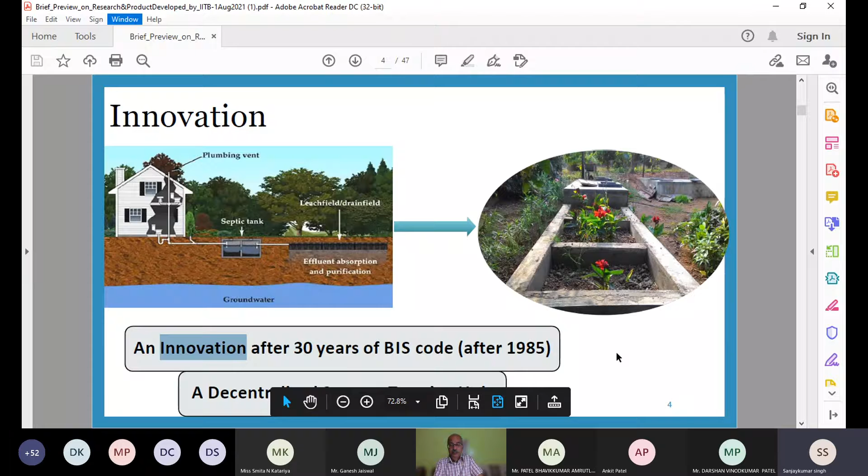Now, if we talk about the conventional septic tank versus our innovation SafeSan: the cost of both systems is low, but the energy required for sludge removal is very high in the septic tank system, whereas we don't have much sludge to remove, so we don't incur a huge cost. Disinfection facility is not part of the conventional septic tank, whereas we can integrate it on request. The cleaning frequency is annual for the conventional septic tank, whereas in ours we can do it every second year.

The reuse potential is not there in the septic tank, whereas in our case we can have a perfect reuse system. The land requirement is very high, whereas here we require half the land of the conventional system. The removal efficiency of total suspended solids is a maximum of 60% in the conventional system, whereas we achieve up to 90%. The removal of BOD, COD and those things is also very high, more than 90%.

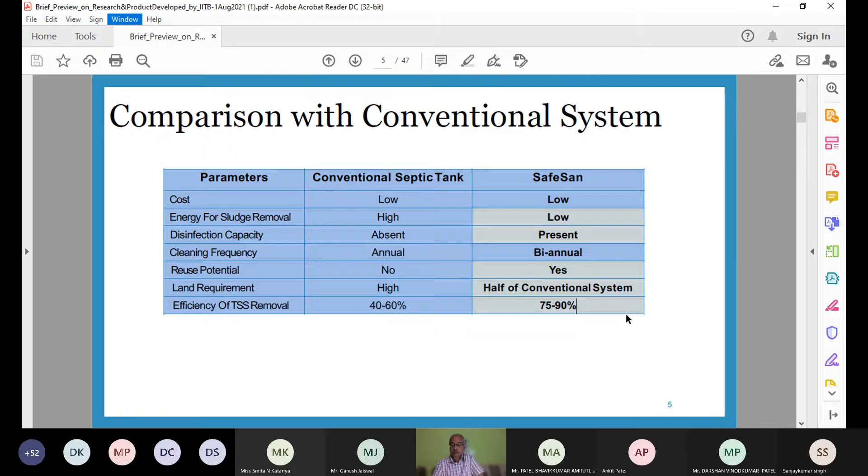So what is the design? This is the innovation: the sewage enters into the first chamber, and then there is a settling unit, which we call PSRT, primary solid retention unit. And then we have this chamber—

Can you please make everyone mute? Sanjay, please make everyone mute, otherwise somebody is sitting very near to his window. Yes, sir. I just ask everyone to— yeah, that's good.

So I hope you can hear me. Hello. Yes, sir, we can hear you.

Okay, then it goes to the digester unit. The digester unit consists of three parts: the first is the aerobic chamber, then there is a facultative chamber, and there is an anaerobic chamber. So three chambers are there. In the anaerobic chamber, I think you must know there should be no presence of external air. The way we have made it aerobic, whatever aerobic processes are there will happen in the first chamber.

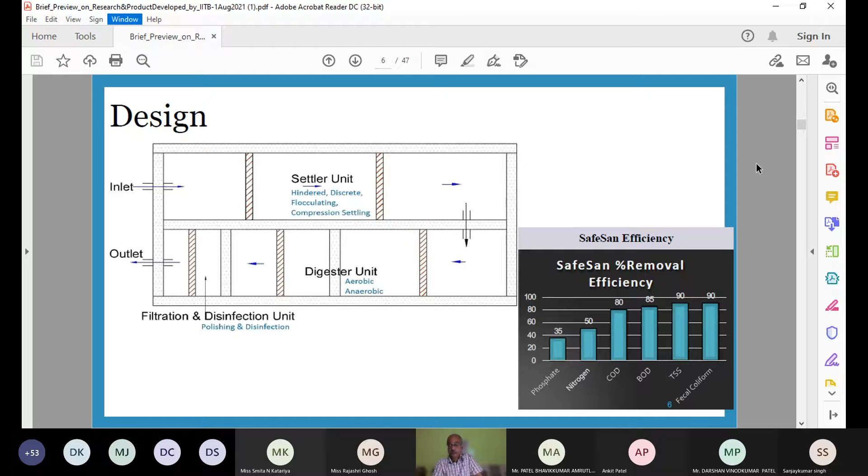I don't want to go into detail how it works, but we have two successful stories. The first one is that way back in 2015, we installed one such system in Alibaug near Mumbai, at a person's farmhouse. As you know, farmers don't want these units to be part of their home, and this guy was no different, so he wanted it kept outside. So this unit is outside.

So this is the toilet, and basically whatever comes out is fed to the plantation. He has these storage tanks for the purpose of flushing, etc. Now this is a very primitive type of design where we built the tank below, though the tank need not be below. Since he has a lot of space, we kept it here, somewhere outside, so whatever comes out stays there. But you can integrate it within your house also without any problem. Now this is called a mobile unit.

Now these 50 units which you see on the right of your screen are basically a standalone toilet. You can make it as a toilet block also. What you see in black is the tank where all the 4 or 5 chambers are included. We gifted, on behalf of IIT Bombay, 50 units for a tribal village called Kaulkhed Gomase, located about 5 kilometers from the Akola railway station. So a person can go inside, do the job, and the treatment will be done here.

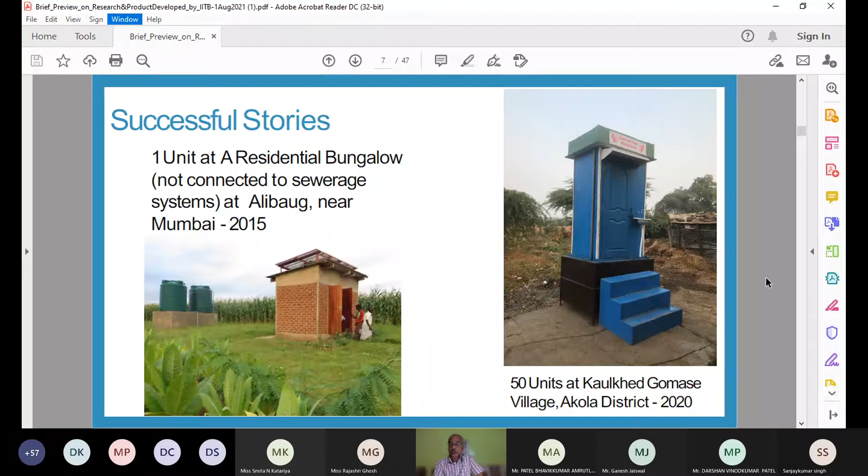So you can go on using it - you can reuse the same water. After a month it will become half, and at that time you can refill it, or use it for the plantation nearby. Now the second innovation which we have done, we have sought the replacement of the sewage treatment plant.

As you know, sewage treatment plants have many machines which consume huge amounts of electricity, and the construction and maintenance cost is very high. Seeing this problem in India, our research group has developed this particular technology which we call GSTP.

G stands for Green STP. Here we are making use of tertiary treatment and secondary treatment with the help of plants only. This technology is basically called integrated wetland technology. The product is called GSTP, and this is an IIT Bombay IP. Our tagline is: Green STP, treating the wastewater the nature way. Now I will show you what I mean by that.

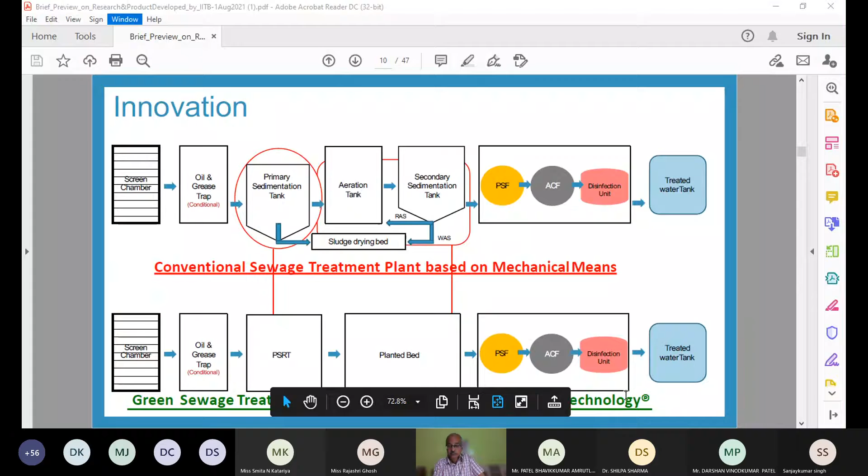Your voice is not audible. Hello, can you hear now? Yes, sir. Yes, now yes. Yes, yes. Okay, okay. Somehow it became, I think, off. So did they hear whatever I said, or do I have to repeat? Sir, for the last 1 minute.

Okay, so what I was telling is that at the top half we have the layout of conventional sewage treatment plant based on mechanical means. Here all machines are there. A screen chamber is there, oil and grease trap is there, primary sedimentation tank (PST) is there, aeration tank is there, followed by SST. Then we have pressure sand filter, activated carbon filter. Please remember these things are provided if required, and mostly in conventional treatment plants these type of things are to be provided. And of course, then it is discharged.

Nobody stores this treated water. Nobody. After disinfection, it will directly go into the drain or wherever they want to discharge it, to the sewer line or something like that.

Our innovation is that we have developed Green STP based on integrated wetland technology, where the primary sedimentation tank has been replaced with PSRT, primary solid retention tank, followed by the planted bed. The beauty of our PSRT is that it incorporates all four kinds of sedimentation in one tank itself by providing enough time for the purpose. The planted bed basically will replace the aeration tank, SST, and even the tertiary treatment. There is no need for RAS, wasting of sludge, or sludge drying bed. Nothing is required normally, and the remaining units can be there as required.

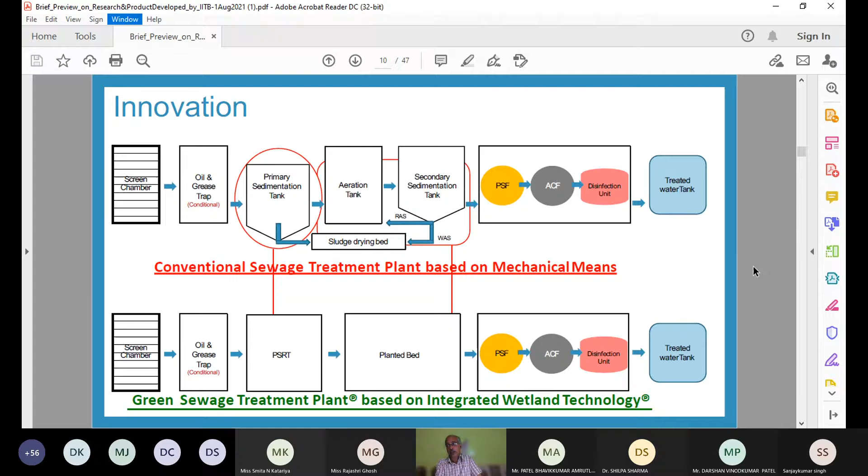Okay, now let's go to the pictorial way. You might have seen this screen chamber with lots of bars. Then you might have seen the oil and grease trap, a small chamber. Then we have the primary sedimentation tank with a raking system, a circular type of system. The aeration tank basically has an aerator which provides oxygen.

So it is costly because there are two types of systems: one based on the surface aerator, one based on bottom aerators where we have the compressor system. There's no motor or fan required there, so that is better in some sense. Then we have the secondary sedimentation tank, again a very big tank required, followed by the advanced system for pressure sand filter, activated carbon for final treatment, and ozonation system, etc. Now in our case, we don't have this type of system.

We provide the screen within your building itself, where 60 families or 300 people may be staying. PSRT is provided either on the roadway, just at the entrance, or near your garden, or below your parking - you can do parking there too. And then we have the planted bed. Planted bed means you can beautifully design it the way you want. I will show some designs.

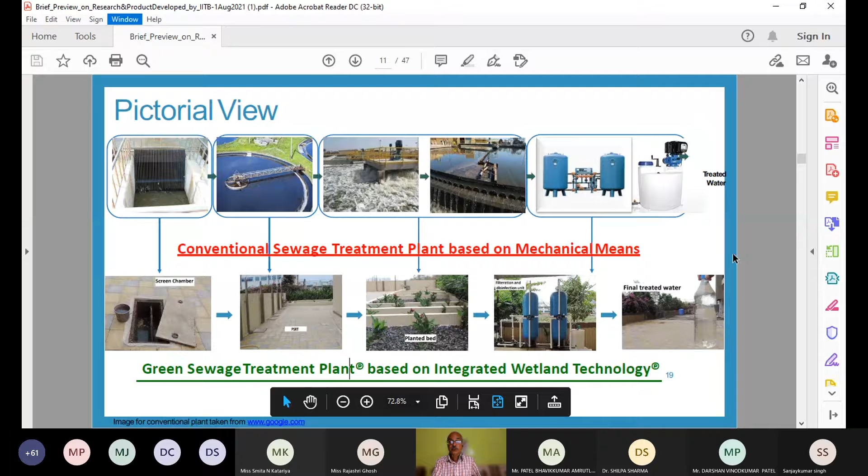So you will not be required to pay sewer tax, etc. You will save two ways: directly by not paying the sewer tax, and secondly your water bill will be reduced, because a huge amount of water is used for flushing toilets or for gardening. You can use the same water, which is very good quality, for your rose garden or whatever garden you have. So the saving is twofold. Now let's come to the design part.

Finally, whatever water is there will enter into the planted bed. What is the planted bed? It is basically the secondary and tertiary removal system. What it does is remove whatever suspended solids and BOD are remaining.

If you see the efficiency, the PSRT removes up to 70 to 80%. I told you there are 4 chances of solid removal, so up to 80% is removed. Very fine particles may still flow out, but they will be captured in this planted bed. BOD is also removed because a lot of organic matter will also settle here.

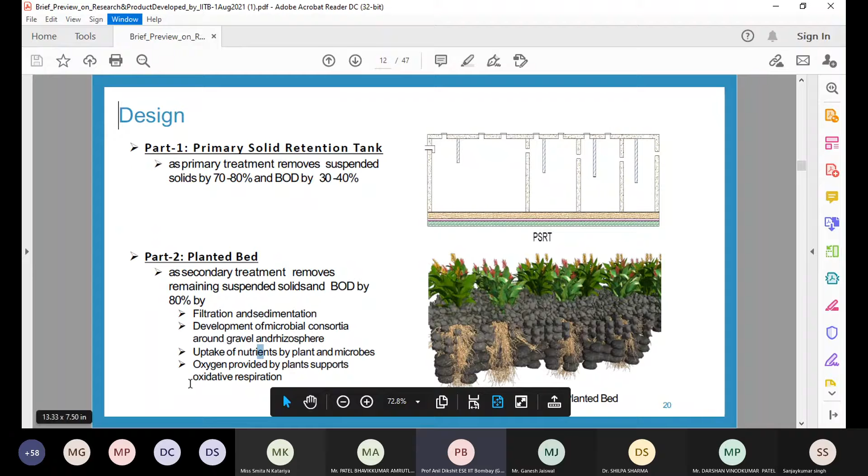As you know, nutrients, nitrogen and phosphorus, are used by the plants. So you don't have to do denitrification, etc. Also, no nitrogen and phosphorus will leave afterwards, which is good, because even if you discharge this water into a lake or river, it will not become eutrophic. In the design, oxygen is provided by the plant, so the BOD will become almost zero. So this is our innovation.

So the success story: we have completed a lot of projects. Sandip University phase 1 has been completed for 300 kiloliters. Rathe Builders in Karjat have small systems, standalone colony or building projects which they have developed. For the university, they have installed three phases for different places, and they have gone for decentralization as well.

So why carry the waste from one hostel to another unnecessarily? Wherever there is a huge amount of water, suppose 500-600 students are staying with a huge amount of waste, they have gone for three tanks or three green STPs there. So we have already installed these.

Now you should not think our system is meant only for 300 KLD. We have MLD plants also. For example, in Lonavala there is a very big hotel, Parias, which has gone for 6.2 million liters, or 6250 KLD. And then there's a society with lots of people and buildings that has gone for a 2 MLD plant.

Now let's talk about our third innovation, which is in-situ Nallah treatment, which we call NTreat. It is a sustainable approach for drain management, which we call Nala. Nala means drain, where wastewater goes and pollutes the whole river Ganges or any other river, etc. So what is the innovation from our side?

What we have done is make use of the Nala itself as a sewage treatment plant. Basically we treat it as sewage because BOD and COD are very high, because mostly industries and houses are illegally discharging wastewater there. What we do, you can see 4 or 5 stages have been shown.

We go for primary treatment and secondary treatment within the drain itself. If you see the picture below, there are some units I am going to talk about. The first unit is a screening unit, placed at an inclination. Then there are 3 depressions, which we call silt traps. Then we have the third section where a lot of baffles are placed.

So baffles will make the water not go straight, but take turns. We have basically created a free-flowing system of obstructions, and because of the obstruction the water will slow down, the velocity will become very minimum. We want to make it zero, but zero would mean flooding would take place, so a small flow is permitted.

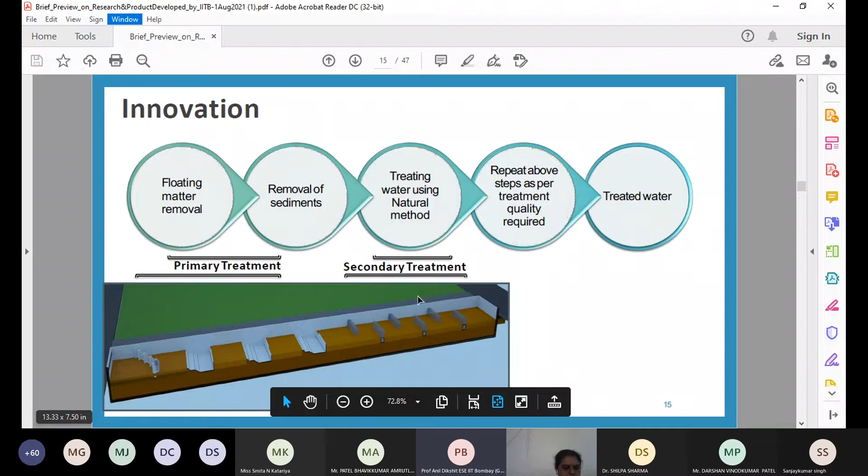This has to be made larger because here the natural biological treatment, NBT, takes place. The whole system is called NTreat, but this specific part is the NBT. These names are given by IIT Bombay. What we are doing is converting that direct 500-meter stretch into a 2-kilometer stretch.

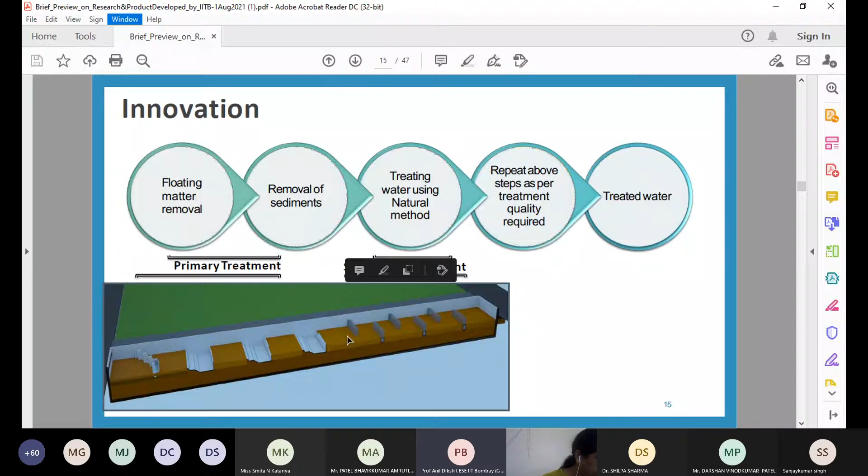As you know, if you make anybody calm, giving silence or solace, the person becomes like a yogi. Similarly, your mind is not moving, and the water is not moving either, it stays there. By staying there, it provides the opportunity for microbes to grow. In the first chamber, for example, the microbes that grow will depend on a lot of BOD. They want easy BOD, like glucose. They don't want fat or sucrose.

They want clear glucose. Now in the baffle, what we do is create not only obstruction, but we make them porous with a screen chamber, and we fill them with three kinds of stones: coarse, medium, and fine, then soil, and then we plant a lot of plants there.

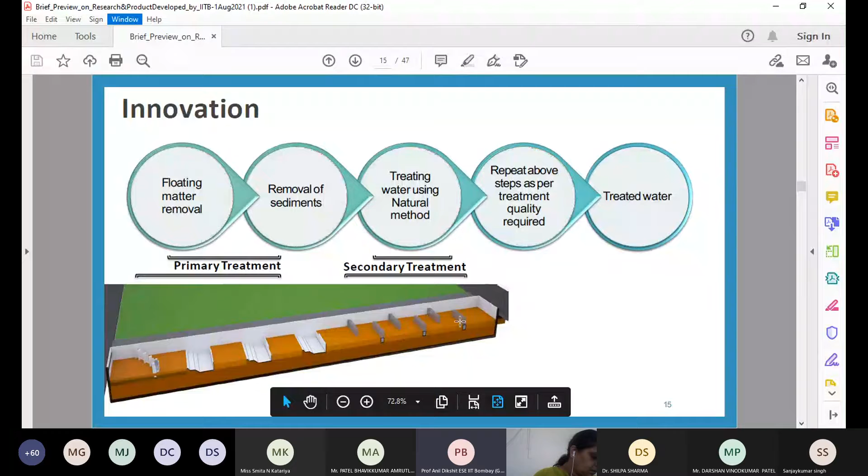Now in the second chamber, whatever BOD has been consumed will become less and undesirable. So initially enough glucose will be there, but afterwards glucose will not be there. Then protein and carbohydrate will be there, and they are used one after the other. So the type of microbes that grow will be totally different in different zones.

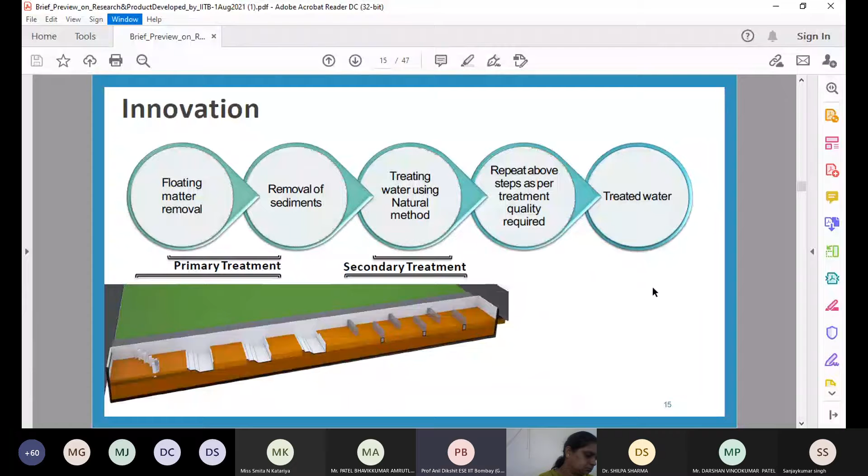How they grow, we are not controlling directly. They grow depending upon the flow characteristics and the loading characteristics. This is our innovation. We are mimicking nature's way.

This is how the first unit screen looks like. It is not provided across, but at an angle of about 45 degrees. Because the screen is at an angle, the floating matter will travel down and eventually reach the last section where it gets stored. So no manual cleaning is required, it is auto-cleaning.

The auto-cleaning system is built into our design itself, because that force component will bring everything to one point, where there is a bucket or automatic belt system that brings everything out. So you can design an automatic logic system. Every 2 hours, whatever has been floating gets brought out.

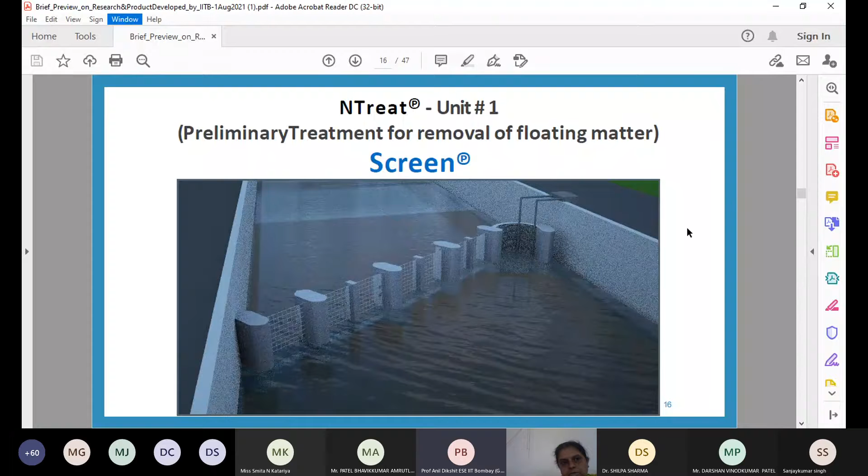So whatever wastewater or nala water passes beyond the screened portion will not have any floating matter.

This is unit 2, where silt traps are located. A silt trap is basically a depression with an obstruction. You can see at the end there is a wall, created as an obstruction, so the water has to flow above it. Since particles cannot climb the vertical wall, they get dropped here. All the coarse particles drop here because the velocity is quite low.

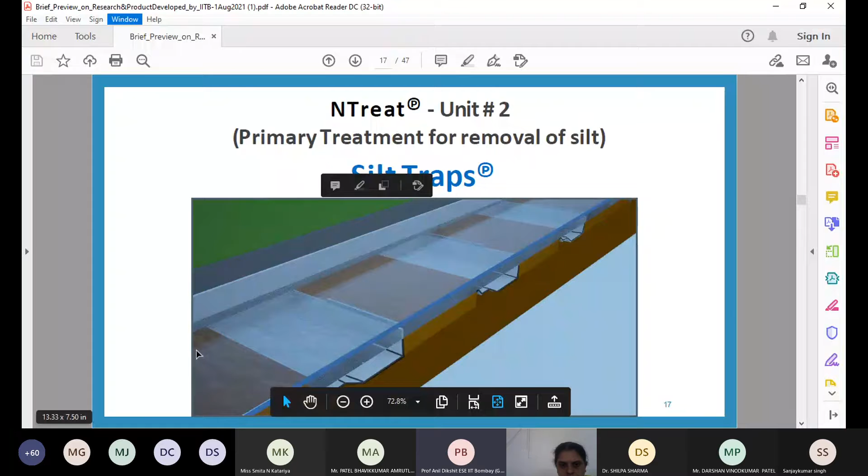Now because of the overflow, velocity, and obstruction, we have provided one screen. The medium particles will settle in the second silt trap, and then the water goes up again, with fine particles removed here.

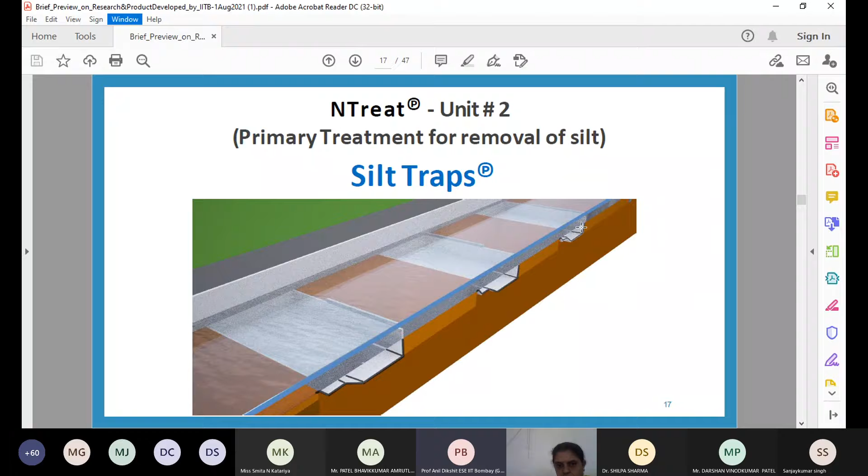Now, the natural biological treatment system. You can see the baffles are there, which are basically screen-based structures. Here the water has to flow in a circular motion, not longitudinal but lateral. It will hit the wall, take a turn, come back, hit again, and go in a circular or serpentine, snake-like motion. This gives microbes a chance to grow in the water itself.

Additionally we have provided filter media, where we use a gravel bed, and similar to the planted bed, we are providing that here as well.

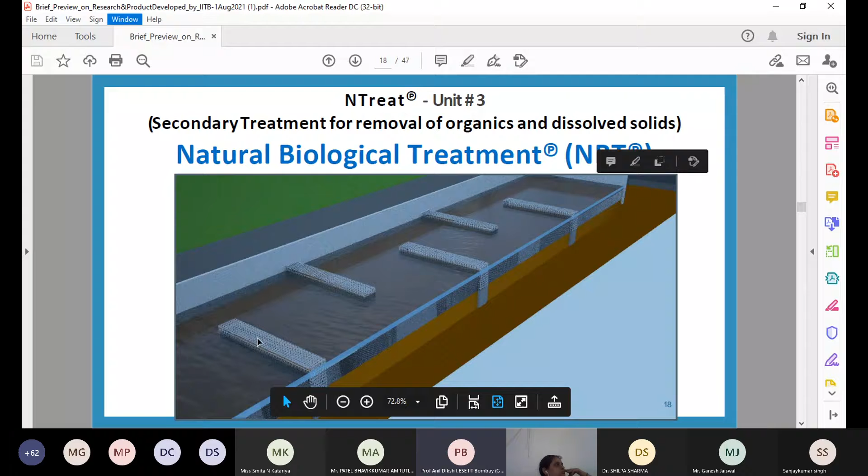Okay, because we have seen now, this is what, how beautiful you can make depends upon the design given by the landscape architect.

Here you can see people are playing. This used to be one of the dirtiest nalas. In order to beautify it, you can see this is the planted bed. Water is permitted through, and we have divided it into chambers. You can cross like a bridge, or if you are in playing mode, you can go up and down like this. So this beautification we have done.

What we have done, we have designed for what is one of the most stinking places in Mumbai at present. But because of the bureaucracy, there's a problem. Five years back we started this project, but it is not seeing any end, because MCGM has to do the job and money has to come from the MLA quota. Nothing is happening. Bureaucracy has taken over. We have provided them the design, but the money is not coming.

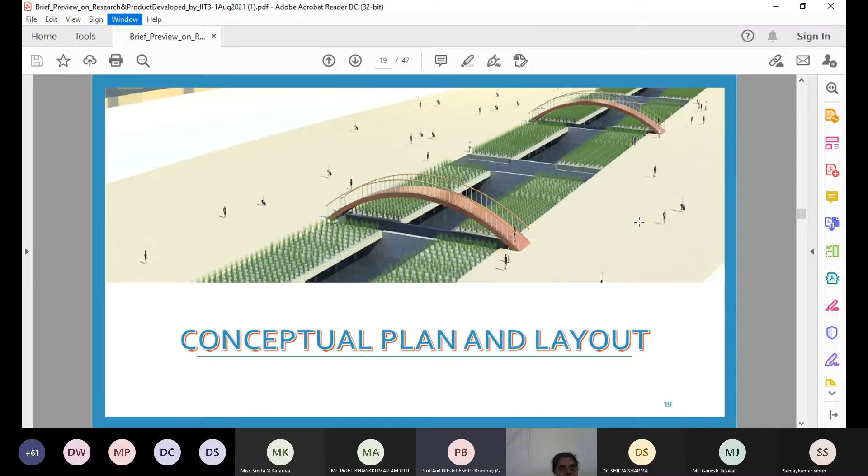Okay, so I don't know when this opportunity will come. I haven't seen it myself yet. Okay, so we have a lot of success stories. I'm going to talk about three success stories, and a fourth one also.

This is about Prayagraj. I think you must remember last year the Prayagraj Kumbh was held. So just before the Kumbh, we were asked by the UP government to install our system. We made a proposal that we could make the river Ganges clean by removing the load in the nala.

See, the river itself is not dirty. Dirtiness comes from the nalas, which carry waste from people who are either doing open defecation or throwing their connections into the nearby drain. So at three places we identified three drains. At Ulta Killa, you can see that the drain was not well defined, with different sections, and basically it meets into the river Ganges.

So we have constructed and given the drain a proper shape. Earlier there was no shape, now it has been given, and then we have constructed it.

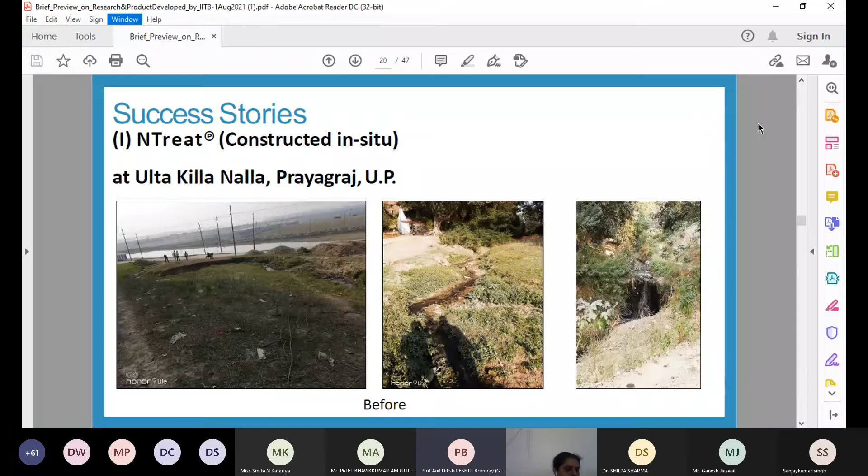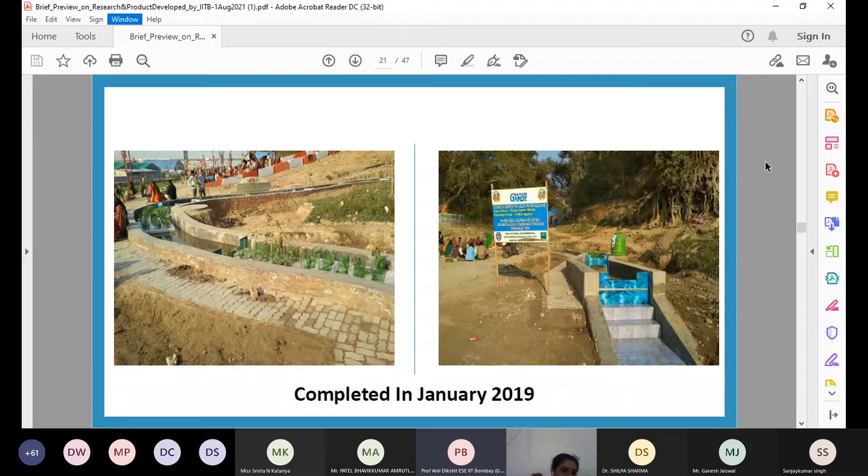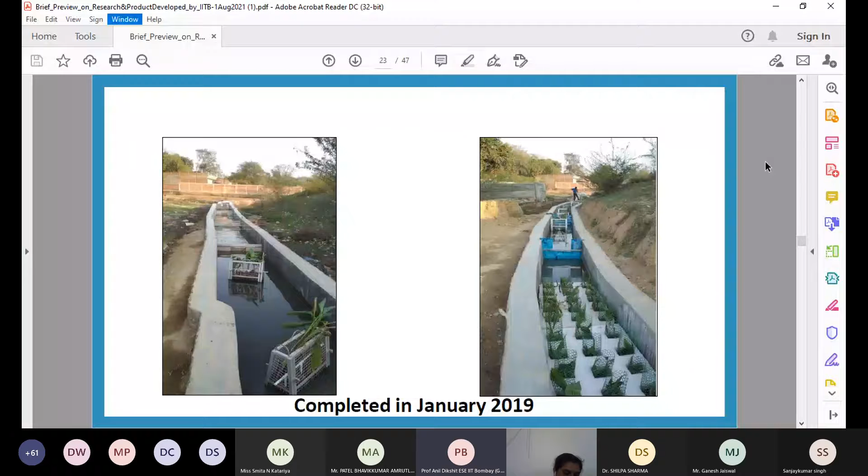So they carried on themselves, and have done a lot of things at the 11th hour as per their sweet wish, creating something that is not exactly the same version as my design. I didn't want to give my design to them, so let it be the NEERI design. The concept is the same, but the designs are different. But you can see this is the place before, and now it's much better. Then there's Savitri Nagar.

We have provided a lot of plants in this way. They have a system called floating system, something like that, which they are using. And this is the prefabricated one, there we have constructed in brick or RCC etc. We went for RCC because Government of India, everything is done at the last time.

So we got only 3 months to install, and Kumbh Mela was supposed to start. And the beautiful story is that on the other side of the river, where drains used to be, many sadhus chose to take bath there. Though it was sewer water, nala water, it was 1,000 times better, because government did not ask us to treat the whole system, and it was very difficult also because river Ganges cannot be treated so easily.

We have to treat all the drains only. If you want to treat all drains which are leading into the river Ganges, I think Government of India cannot afford that money. So Government of India only did the eye wash at that time, but the result was seen immediately.

We were very happy that many sadhus chose to bathe there because they liked that water as compared to the other, which was dirty. It was not turbid, it was not stinking, because we allowed the plants to suck all the BOD and everything, the nuisance. Even the odorous compounds were also absorbed by nature.

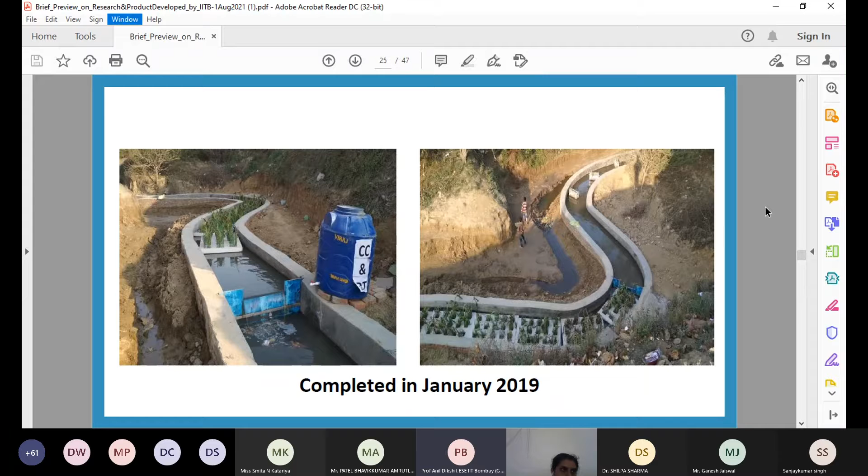This is the system which is prefabricated, and this is our system. We have installed this system as part of our obligation towards MMRDA. MMRDA has given us a very big project, I don't want to talk about that, otherwise it will take 15 minutes more, so let's not talk about that. But we have an obligation to show them that our system is working.

Since BMC doesn't allow us to construct within the drain because of a lot of bureaucracy, I have been struggling to get permission for the last 2 years. I became sick of it. So because of my own innovation, I constructed everything in prefabricated tanks.

Now, in order to simulate, we are pumping. There is a drain here behind this particular tree, which is very stinking. You cannot stand there for five minutes, such bad smell is coming because all Hiranandani sewage comes there only.

So what we are doing, we have installed a submersible pump. They are pumping the whole thing into the first chamber, and we have a stilling station, and then it is working. So we are going to generate the data for the next 3 months.

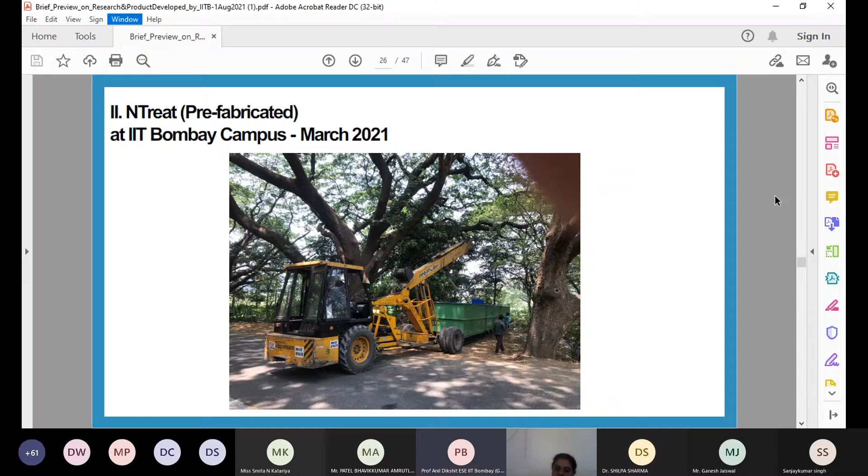Now this was about the three popular things in the area of wastewater. Wastewater is the biggest problem our country faces, because we have scarcity of good water also. We are converting good water into bad water, but we are not reclaiming the bad water. Because of that, many places have scarcity. Even Mumbai has scarcity, such that in May and June, during summer, water is only given 2 hours per day to most residents, except IIT Bombay and some campuses, because we can make our own water.

So we don't have that problem. We have 24 by 7 by 365 days running water all the time, but all other citizens are not that privileged. Now I'm going to talk about some of the work we have developed in waste management. I think municipal solid waste management is the biggest challenge, because it affects you on a daily basis. You see the dump, you have to breathe the bad odor coming from these municipal dumps. So we came up with innovation, not in the way landfills are typically made, but our own integrated system, so you can do it at low cost. Our system also gives you a lot of benefits.

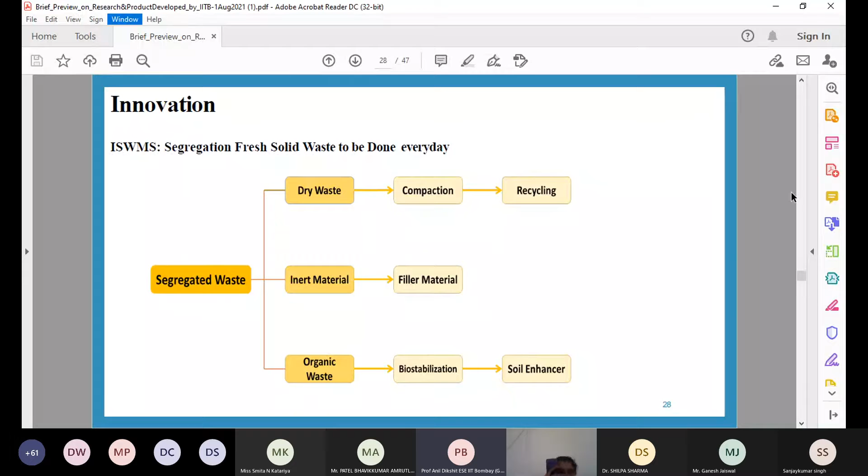So let's talk about the first part, how we are proposing the management of dry waste. Dry waste, basically, we can do two ways: manual or automatic sorting, followed by baling. Baling means compacting. So mostly I propose not to go for machines.

Rather, we can make a facility with lots of conveyor belts. Conveyor belt will go on, so you have to divide it. Suppose one truck is coming, it will be loaded in one line, the second truck in the second, and there are three parallel systems where lots of laborers will be sitting or standing, and next to them there will be a manual sorting system where they have to pick it up by hand and put it into the bin next to them.

Where glass is written, they will pick up only glass. Where paper is written, they will pick up only paper. Since they run very slowly, this system means one truck will take about 8 hours of sorting. That's why we have to have 3 lines, so that 3 trucks can be loaded at one time, and after 8 hours, the first one will become available, and so on. Mostly we have to time it in such a way.

If you have to make more lines, or go for automatic systems—if you have 300 trucks coming, then you will become mad. But if it is a small town, then you can do it usually very easily.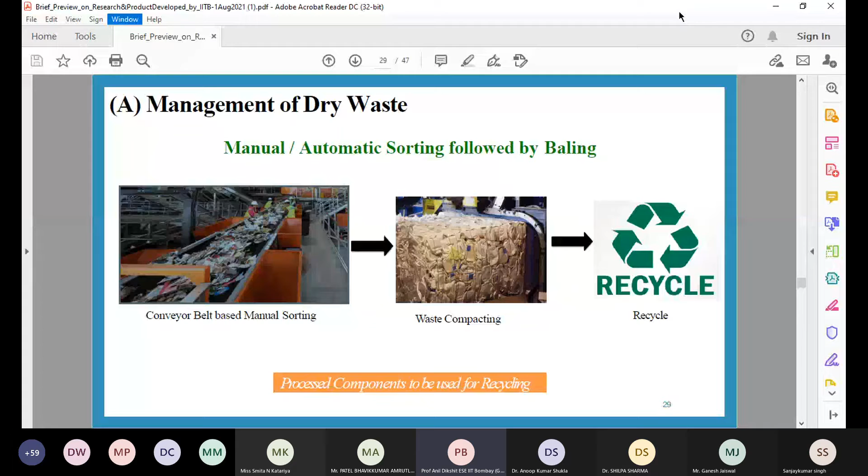Now the second part is the inert waste. So inert waste is one which has nothing useful left in it. You can see these are two components which have been shown. Basically, we go for their grinding.

So we put everything in grinding. Now, since different materials may have requirements of different speeds, etc., you may have to segregate a bit based on their density, or the type of waste coming in. Basically, if you can do source segregation, that is better, not put everything in one go. You do similar type of collection with one truck going only for that type of collection, and this kind of approach will be much better.

Or if it is coming out of your sorting lines, then you don't have anything. Here you have to go for size separation with the help of a trommel, and then go for grinding and crushing them so that you can use them for the purpose of filler material. So the process material is to be used, and you are getting value everywhere.

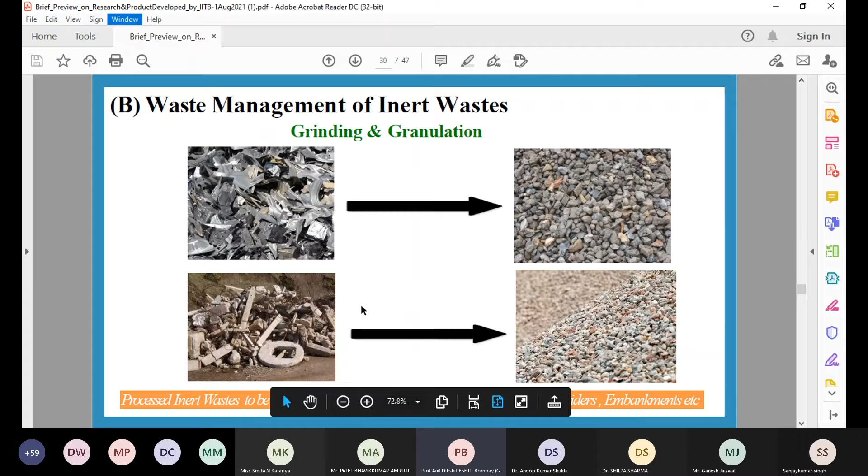The C part is the treatment of wet waste. Here we have developed our own technology, which we are naming biostabilized aerated static piles. It is a perfect substitute for the windrow system. The windrow system is very obnoxious - everyone knows it is very capital intensive, and a lot of labor is involved, and it is very informal. People have complained that they become breeding grounds and stinking places, so a lot of people complain and file PIL against you - you may go to jail for none of your fault. So we have designed our own method.

In the first picture, as you can see, there are plastic pipes which have laterals and headers. Above that, of course, we have shown them, but they will not actually be made that way - trenches will be there, everything will be down, and then the bed will be made. A porous bed will be made, and above that the waste is put. So every day, depending upon the volume, one or more of these piles are made.

You will discharge it and make the second pile. In the cross section, air pipes are shown below as two drains. Air is put through with the help of a blower or compressor - we put oxygen, or rather air, inside. What happens because of that? Enough moisture is anyway there - you can see this is quite moist.

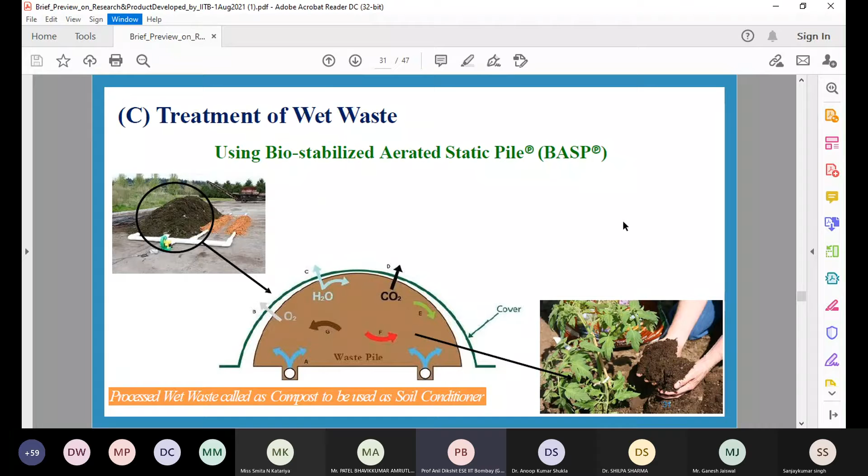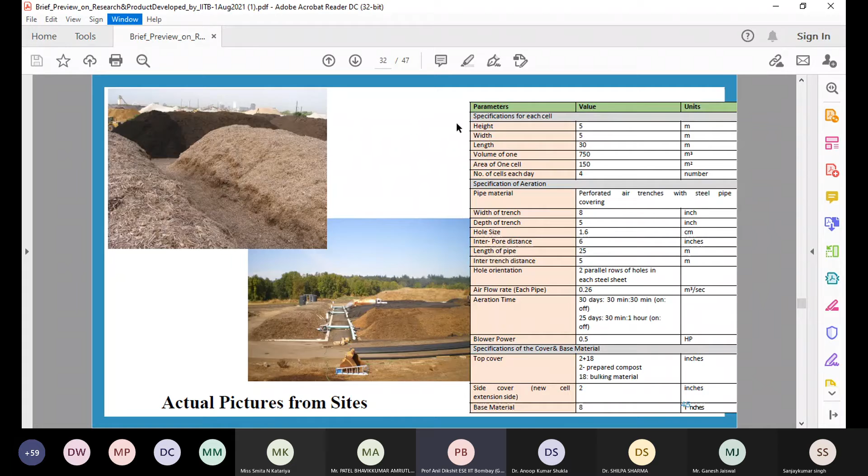There are two success stories to our credit. In 2017, we gave this design to Mira Bhayandar Municipal Corporation, and they have implemented the BASP process.

Naya Raipur Development Authority for their Atal Nagar. Earlier it was called Naya Raipur, now it is called Atal Nagar. After the demise, they renamed that city. So there also we have given this print.

I am not aware whether they have constructed or not, there is no follow-up from them. They have not taken any help for the project management and all those things. That's why now we provide the service only when they involve us, even at the project stage.

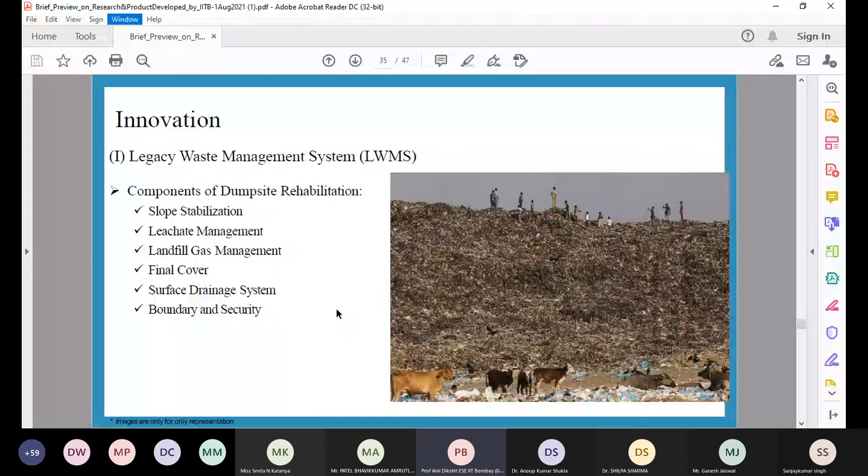Slope stabilization is the first part. So whatever is here, we want to construct it like that. We will stabilize at 4:1, 1 vertical, 4 horizontal, and give this slope. Of course, after compacting, we do it in stages.

And then construction and demolition waste is used as the top cover. Now no further waste will be able to be discharged here. Now for stabilization of the slope, surface drainage system has to be provided at the same time.

Because during the rain, if water comes, it will make cuts and erode. So we have to provide safe passages. And we have our own design of flow ladders. So flow ladders are provided, and ditches are there all along.

We also make the road, so by the side of the road, this system is provided. You can drive it to the top and enjoy there. There could be good parking, there could be a lot of space, particularly in urban areas where there is no place for enjoying.

You can make it as a good park, or you can make it like a biosphere, or you can make it top of Bombay or top of Surat or top of Jaipur and things like that. Though it is waste, let it not be waste.

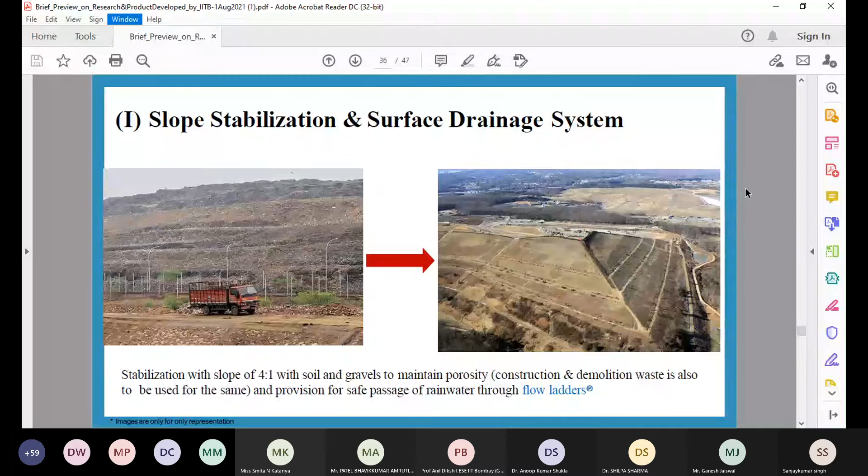For leachate management, whatever leachate forms, because whatever we do, we cannot make the slope 100% impervious, so some amount will go and come as part of leachate. So a lot of leachate drains will be provided all along the slope, and we also have to have a storm management system. When a lot of rain occurs, it should not cause problems.

Otherwise, it will divide the whole landfill into 5 parts, and the whole water will be going there. It will be a problem because one car can go inside, and then people could die, because you cannot recover them, as they may go 50 meters below, etc.

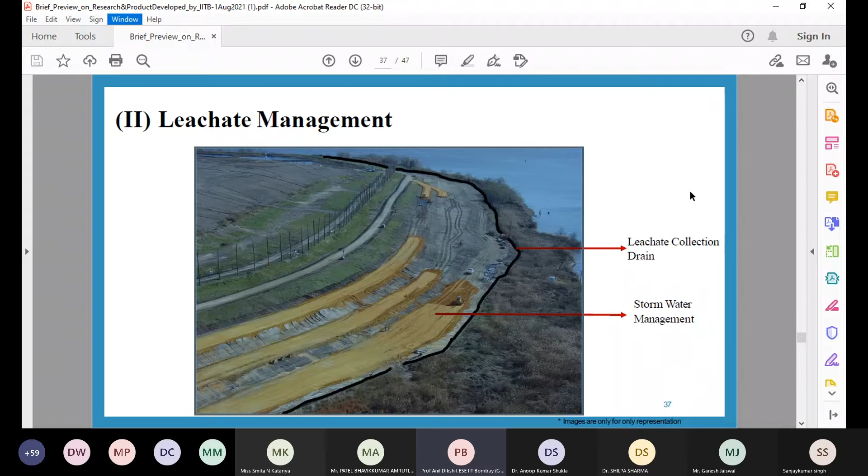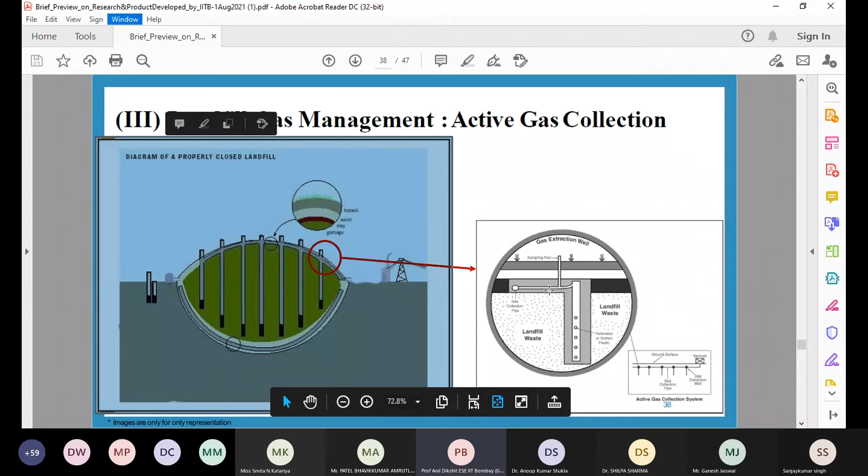The landfill gas management system works like this: after the top cover, we put in wells of different depths. Basically, we install an HDPE pipe with lots of holes, and then we fill the annular space with gravel of small size to provide porosity.

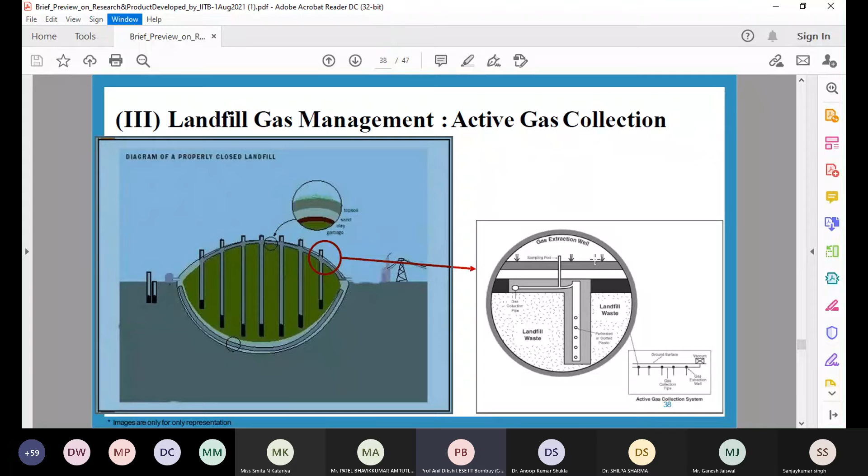Because of this porosity, there is a chimney action, and the landfill gas gets sucked in. You can collect it with a gas extraction system using a blower, and then either flare it or utilize it. You have to provide one well every 10 meters, so you can understand a huge amount of landfill gas will come. This gas can be burned in a gas generator to produce electricity connected to the national grid, or used for your own lighting, etc.

We have to provide the final cover and make things beautiful. So we are going to make this landfill look like a forest in the city, or a mountain in the city. The final cover has so many parts - above the waste we have to provide so many layers. I don't want to go into detail, you can go through it yourself.

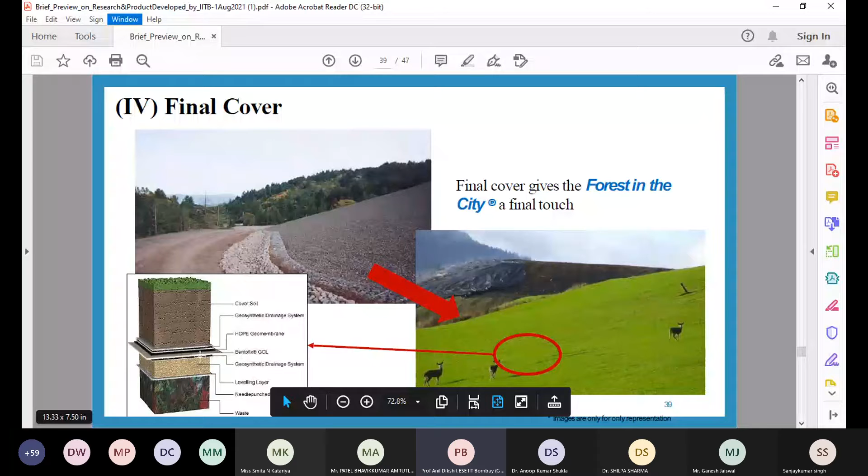This is the post-closure view. So many things are to be provided. You can see it is not a very small system - it is a very big system.

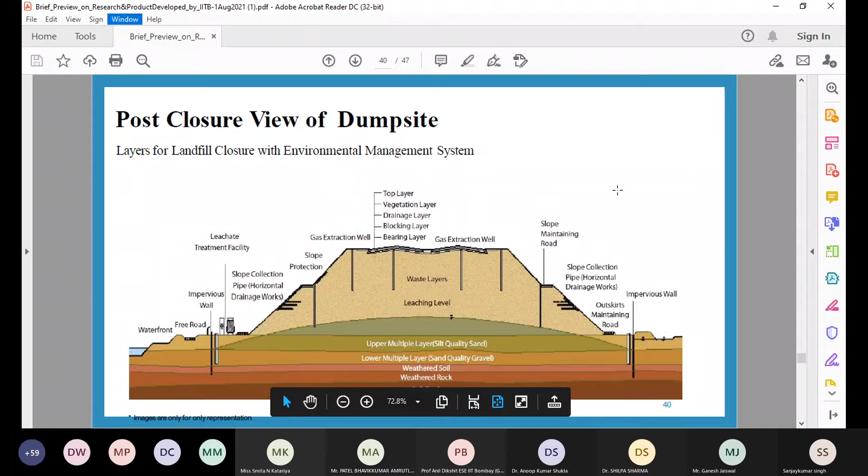And this is what it will look like - instead of that bad scene where people were standing and cows were running all along. This is the passive system for gas to escape safely, where they haven't done anything except allow it to go away safely. So you should not stand here and talk, you should not sit on that. Otherwise, with lots of methane and carbon dioxide, your health may deteriorate.

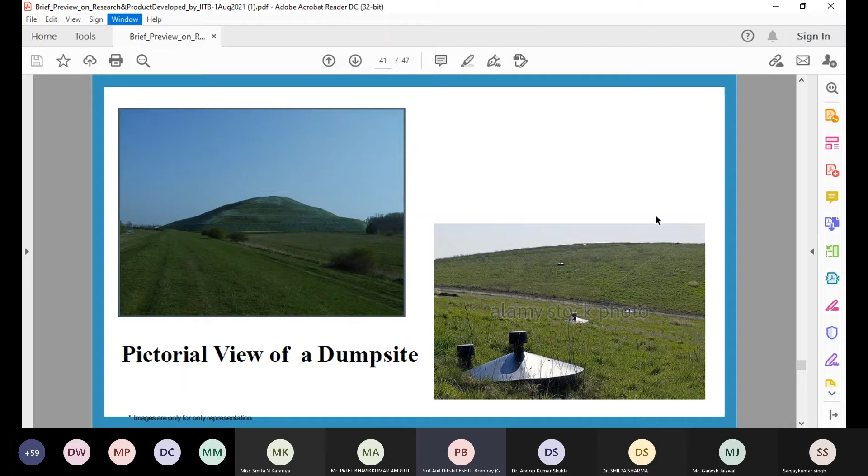These are the success stories. We have been lucky to have worked with Mira Bhayandar Municipal Corporation, giving them a solution in 2016, and after 2 years, MCGM and Lonavala Municipal Council also took our service. We have been lucky.

The second system is called the legacy waste management system, also called biomining. Some problem... this is the same picture, but here we have to do biomining as per CPCB guidelines. Basically, we have to implement and select this technology.

Basically, all this waste has to be biomined, meaning it has to be mined. Mining means just like we do for coal mining - we remove some part, bring some 10 tons to our plant, and there we remove the components.

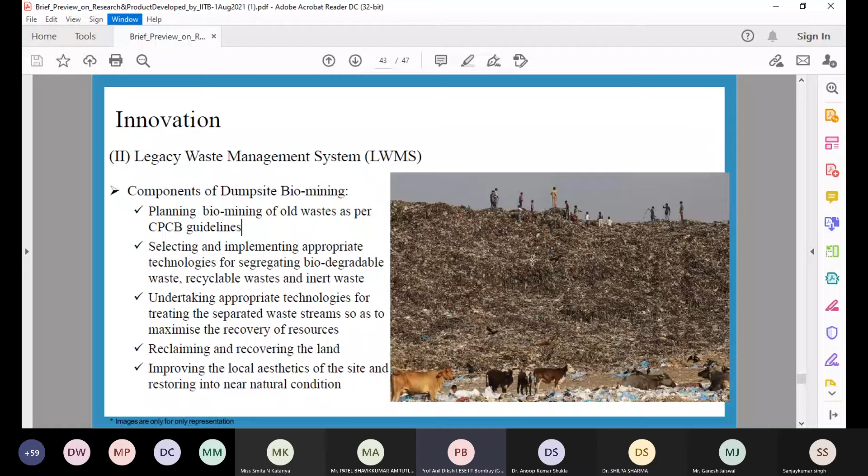So let's see what is the component selection - I don't want to read it all. You have to install a trommel and feed it physically. Trucks will come one after another, so you have to make a ramp leading to a discharge pit, and then there are trommels of different types. Different kinds of waste have to be removed and then sold or given to the municipality, who can do whatever they want with it.

Dry waste, all this waste - these are the machines which will be required. Security has to be perfectly provided, a baling system has to be there, as you can see here, and all these machines will be present.

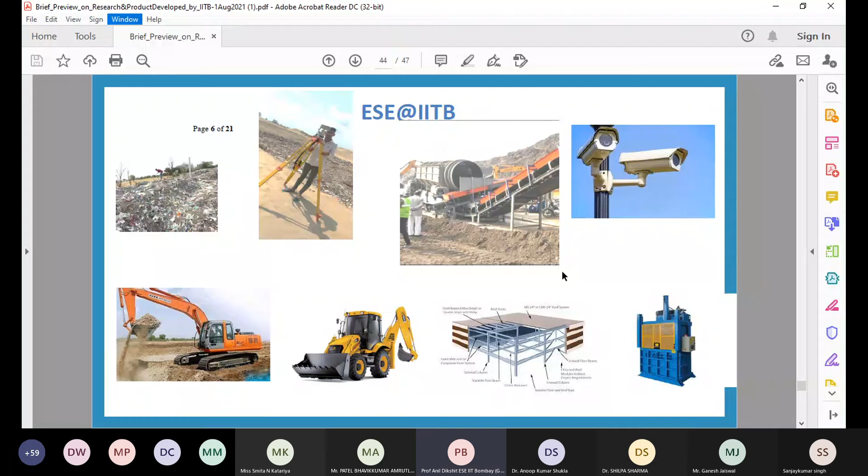Biomining takes time - suppose your waste took 30 years to grow, it will take at least 15 years to destroy. It is not a quick system, because machines have to go inside, cut the face, and bring it back with hundreds of trucks. Loading cranes will be put in, cutting machines will cut, loading machines will load, and trucks will take it to the plant for processing. Everywhere there is money involved, so normally you should avoid it if possible.

So we are in the process of working with the Ayodhya Development Authority. They have the Sita Maiya Lake, which has been filled with garbage - we love Sita Maiya, but we don't love the pond in her name. Our people have filled all their garbage from that area into that particular tank.